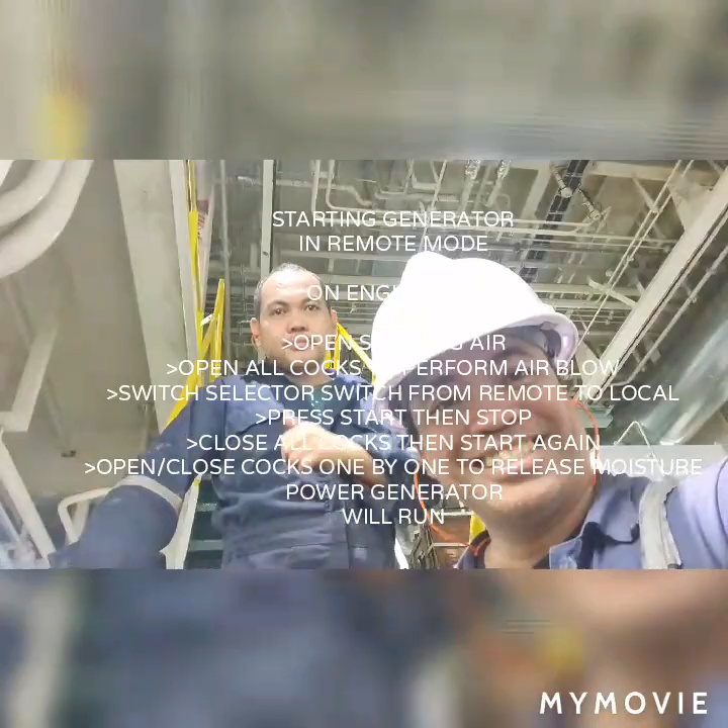So let's go. On the engine side, you will need to open first the starting air. So this is the starting air valve. You need to open this one. Then once you open this one, you need to put this lever from stop position to run position by putting it down.

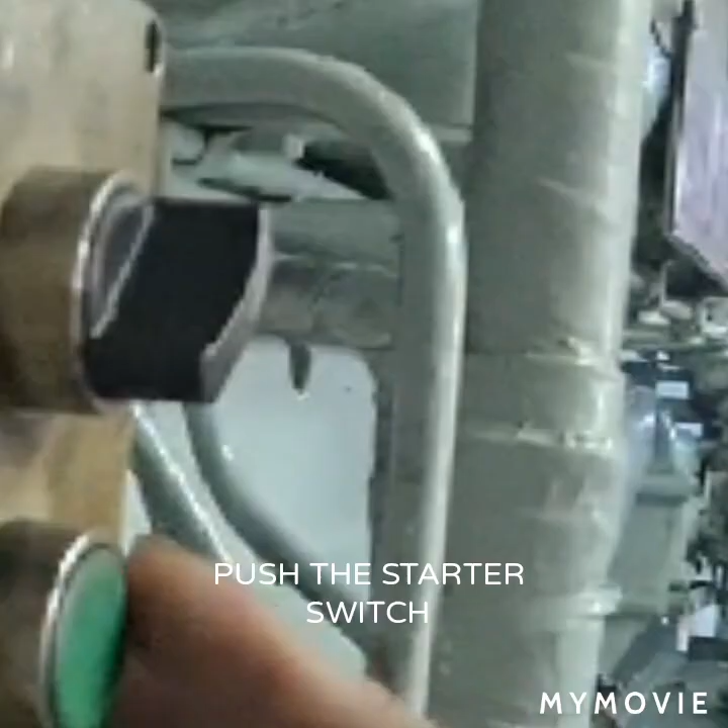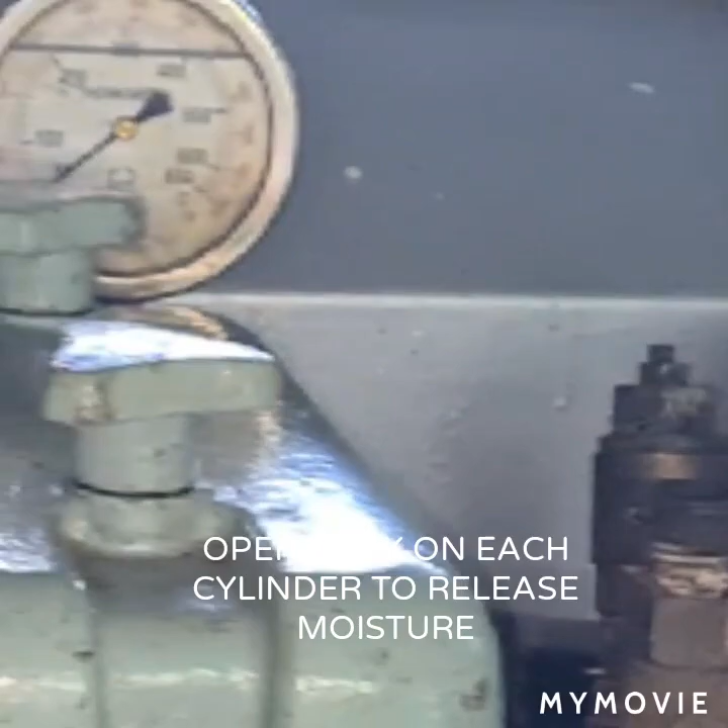This is a mode selector switch which you need to put from remote into local position. Then push the start switch to run the generator where the lever is in run position, and keep waiting until the speed reaches 720 RPM.

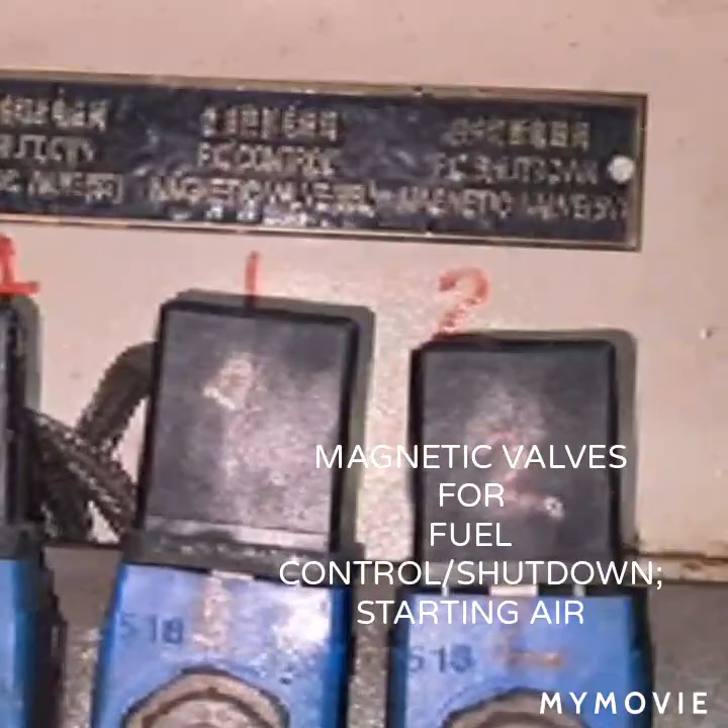Those are the gauges, pressure gauge, temperature gauges from which you will be able to see generator parameters. In practice, when generator runs, all the cocks on cylinders are open to remove and release all the moisture. This is a magnetic valve for fuel control, shutdown, starting air. Those magnetic valves are activated when you start and stop the generators. When generator runs, the fuel is controlled by means of these magnetic valves.

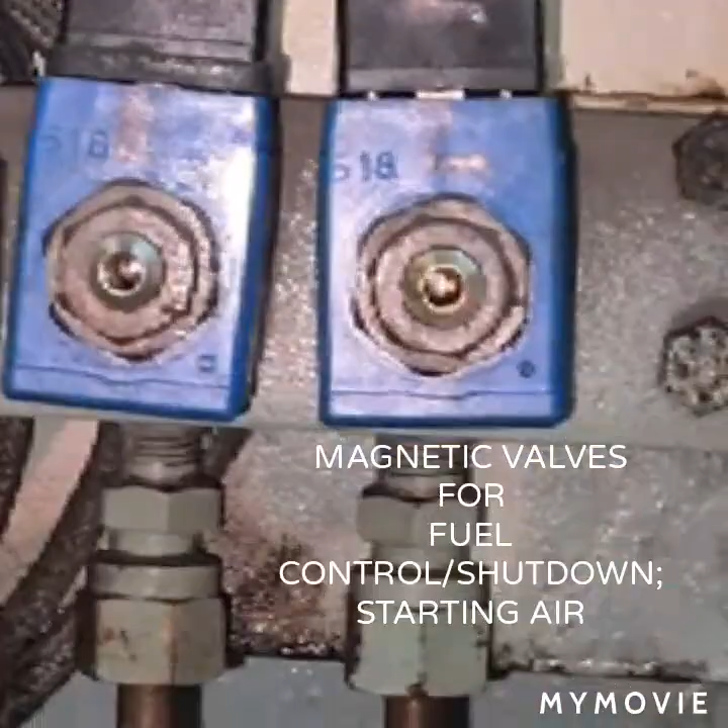This is the speed RPM pickup sensor from which the actual RPM speed of your alternator is sensed and displayed on this panel monitor. Start failure will be activated when the starting air is closed. This ready to start blue LED light will be activated when the pressure, temperature, and speed pickup are in good condition. All the parameters on generator are satisfied.

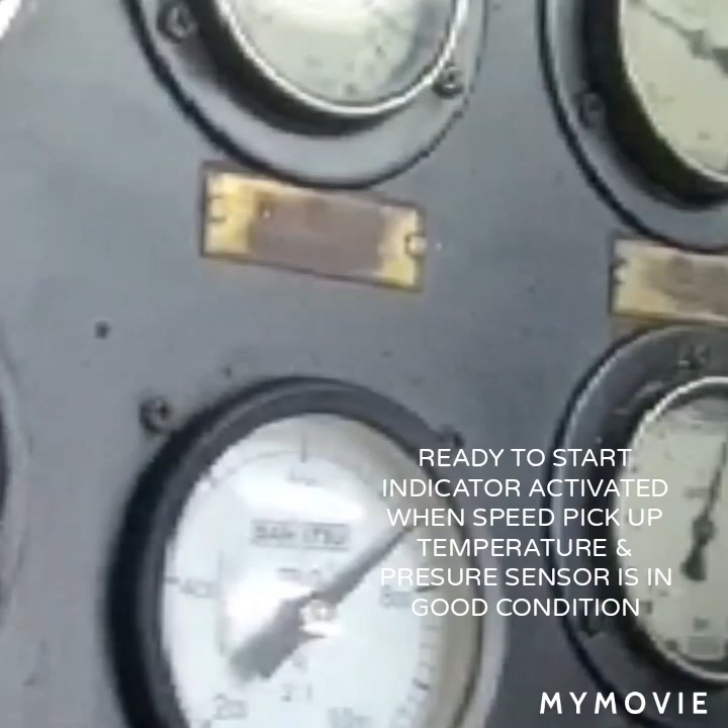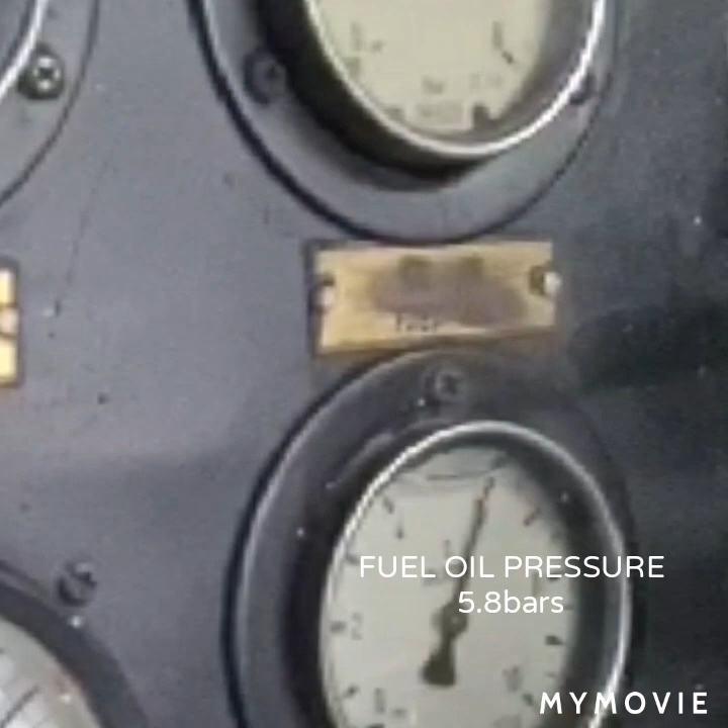In here, you will observe that the fuel oil pressure we have here is 5.8 bars. This is the working pressure of my generator when the generator is running. And this is my revolution per minute, 720 RPM. In practice, when the generator starts at first, open individual cocks to release all the moisture accumulated on the cylinders. 1, 2, 3, 4, 5, 6. I have 6 cylinders.

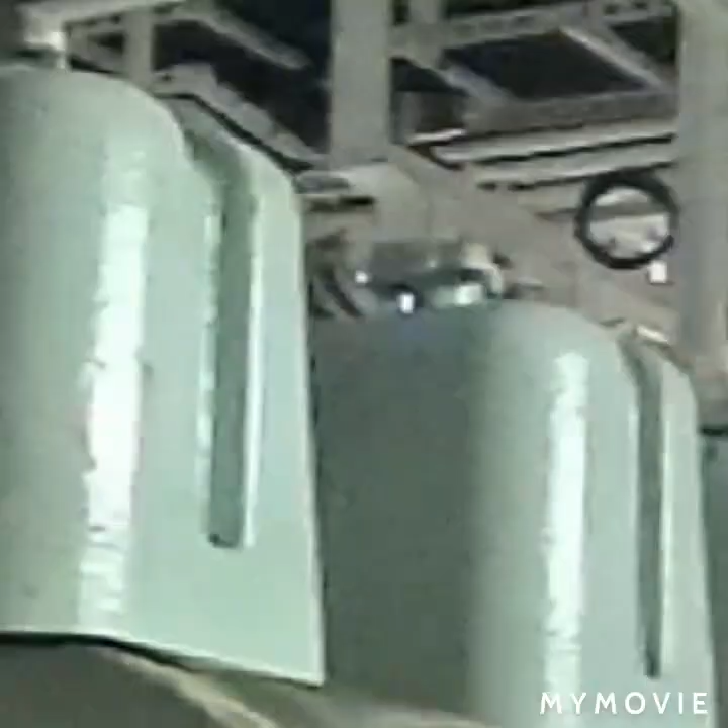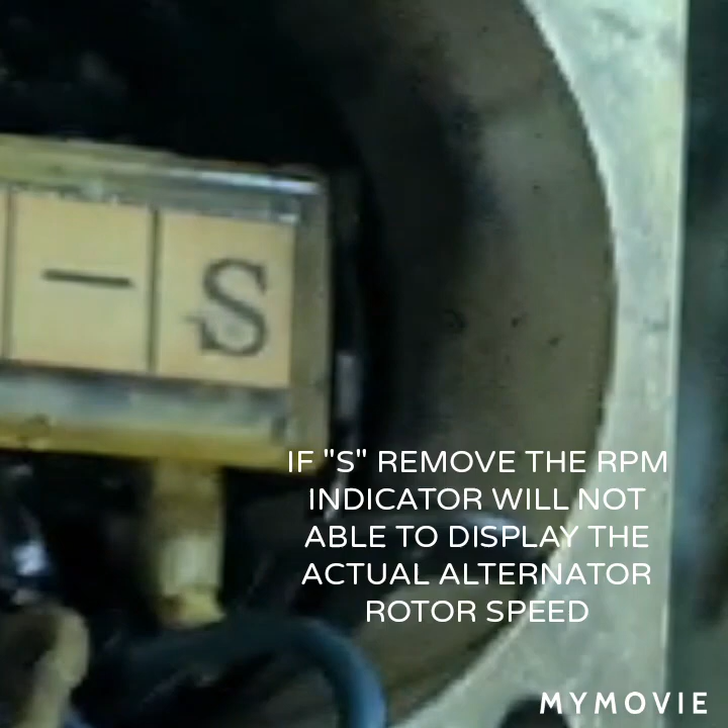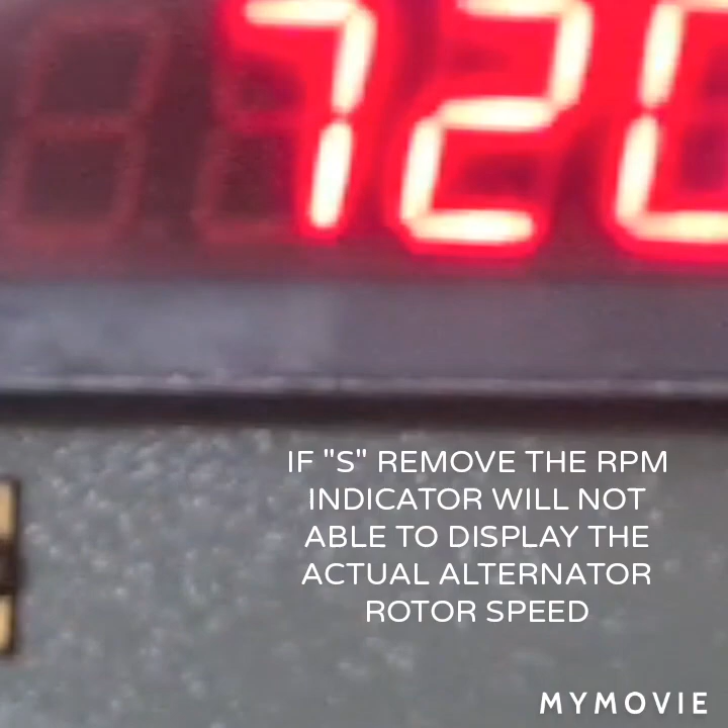This is the RPM speed pickup sensor with plus and minus 24 volts DC supply, and the S is the signal which gives 720 revolutions per minute, displayed on the local starter panel on my generator number 3. Also, I have one RPM speed pickup sensor which is responsible to indicate that my generator is already running.

Once it detects that the alternator is running, the green LED light on the engine control room and on the local starter panel will be indicated. Once it is removed, even if the generator is running, the running LED light on the starter panel and in the engine control room will not be activated. So I have two RPM pickups. One indicates running and one is used to measure the actual speed of my alternator.

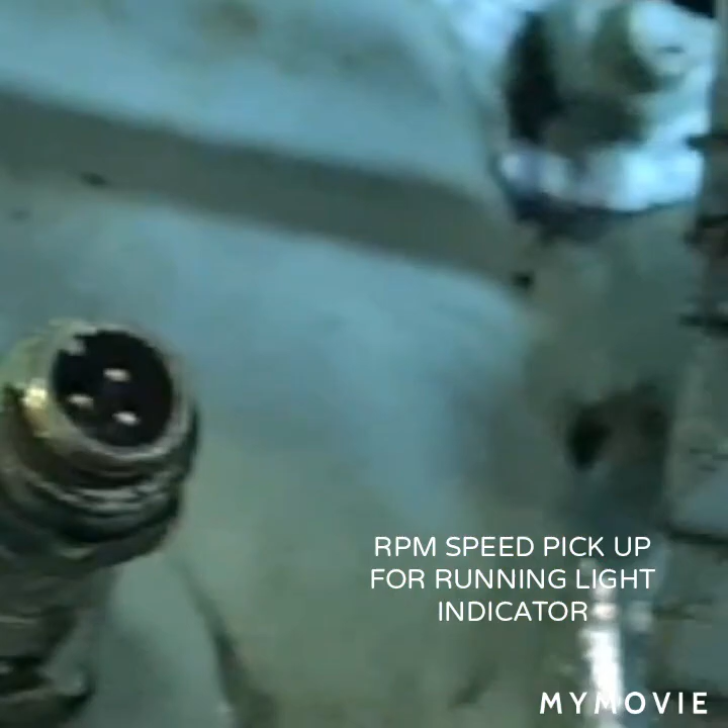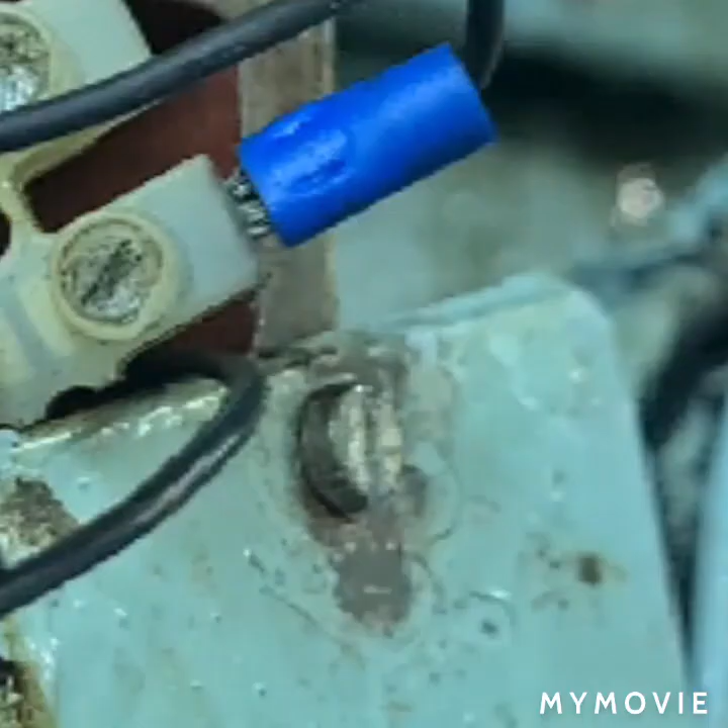This is the terminal of my fuel oil leak. For testing it, I just remove the cables. The normally closed contact will be open and the leakage high level alarm will be activated. But normally, to test this one, you need to put oil in the tank. The floater level switch will be lifted up, the normally closed contact will be open and the fuel oil leak alarm is activated.

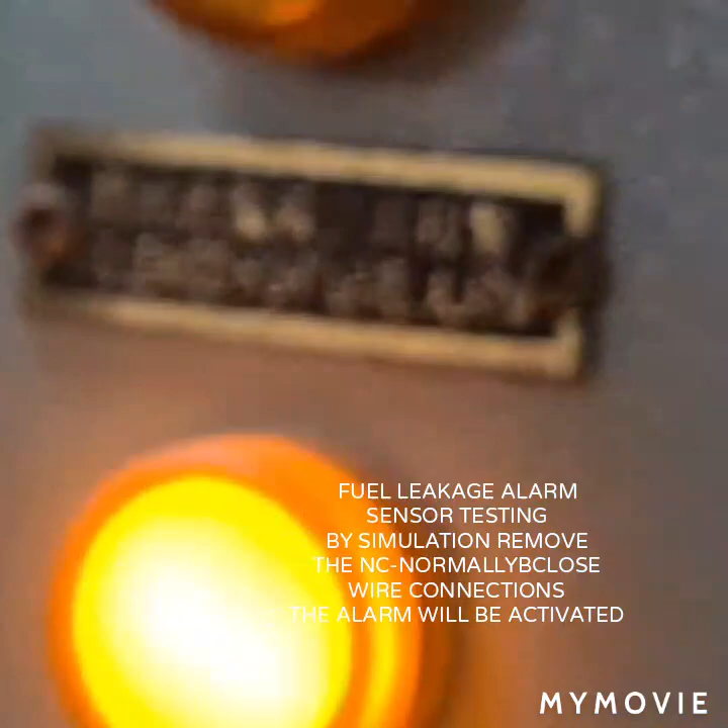Now I'm going to put it back, and as you would notice on the engine control room monitor, all the alarms that we tested will be displayed and verified. Sensors are working.

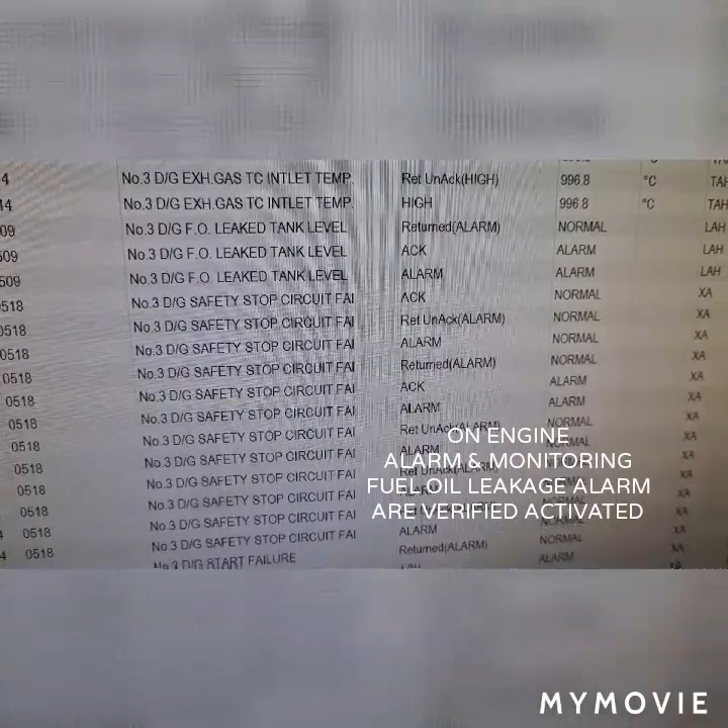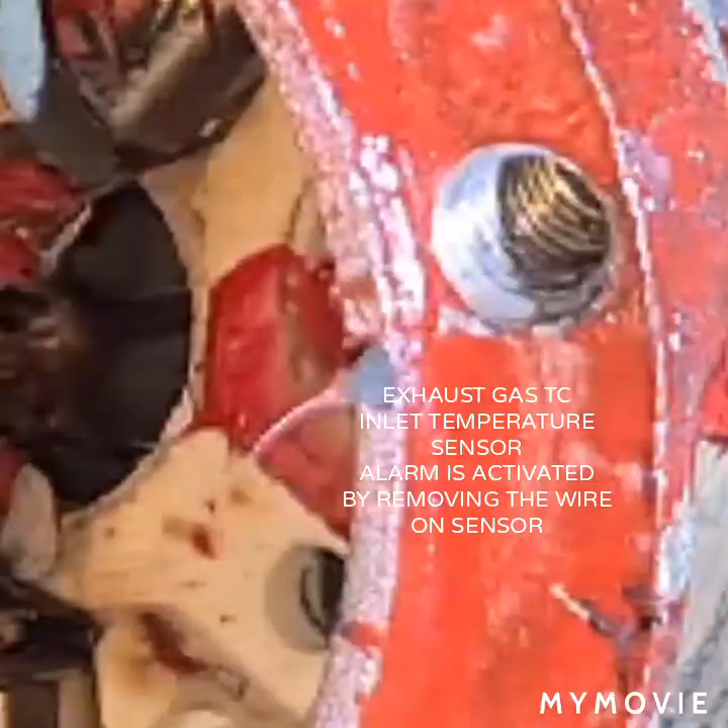This is a thermocouple sensor which monitors the exhaust gas turbocharger inlet temperature, and the alarm will be activated by removing the wire on the sensor. Normally, these sensors monitor the temperature of the turbocharger also.

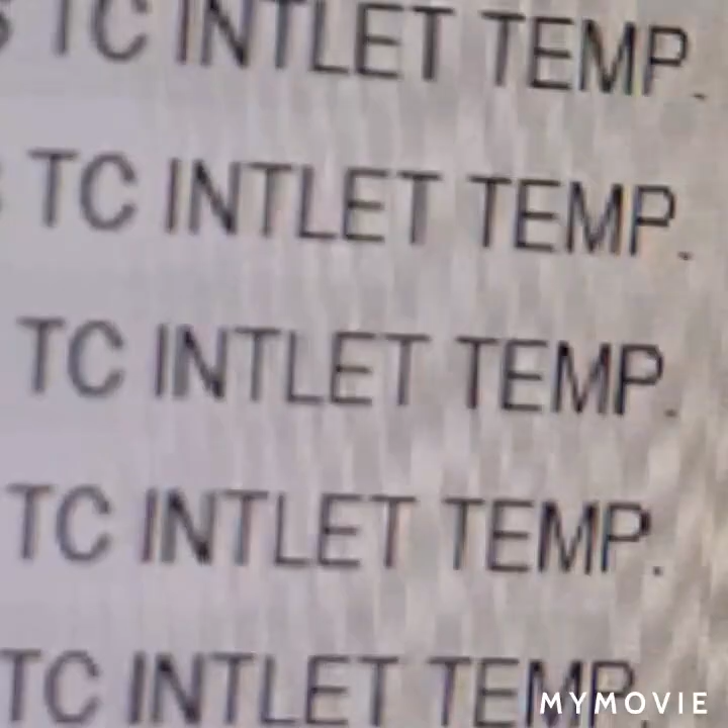On top, I have the HT fresh water outlet temperature sensor. Alarm is activated by removing the wire on the sensor. Normally, its working temperature is 70 degrees Celsius and the high temperature alarm set point is 85 degrees Celsius. Because the location of the temperature sensor is high, I would rather proceed to this terminal box and remove one of the three cables.

Once you remove one cable, the alarm will be activated and it will be reflected on the engine control room alarm and monitoring system.

HT fresh water outlet temperature.

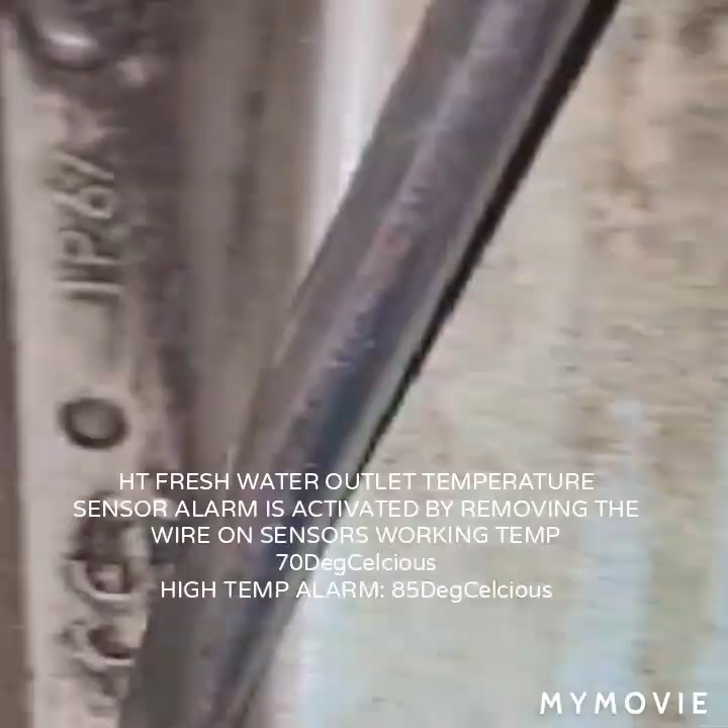This is a thermostat switch known as cooling water temperature high trip shutdown, also known as HTW out temperature high. Alarm is activated by removing the wire on the thermostat switch. The working temperature of it is 69.6 degrees Celsius while the generator is running, and the high temperature shutdown is 85 degrees Celsius. By removing the cable, the generator will stop.

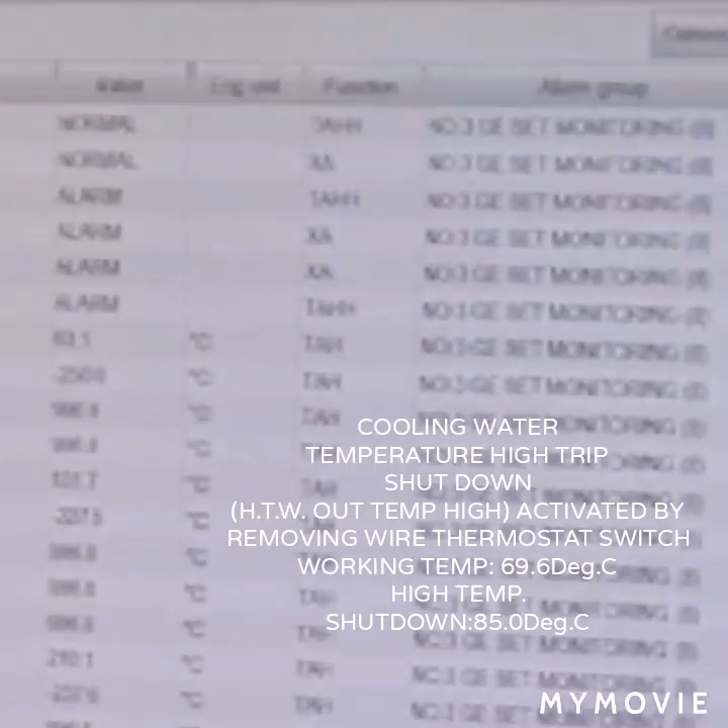As you would notice and see here, there is a red LED light indicated on my panel, and there are alphanumeric codes or letters indicating that the alarm is activated. So we verify that this thermostat sensor is working good. So we need to put back everything, all cables, and start again the generator to continue doing a test of the alarm and shutdown.

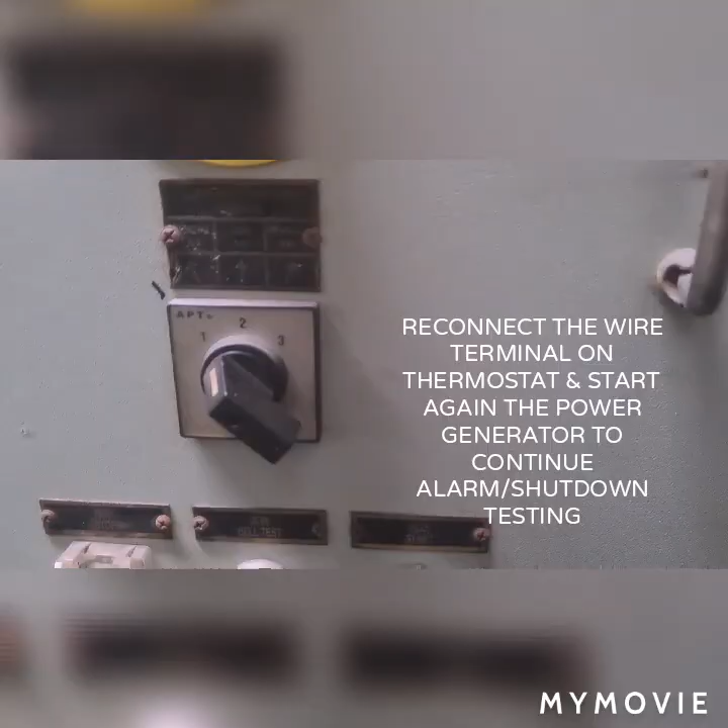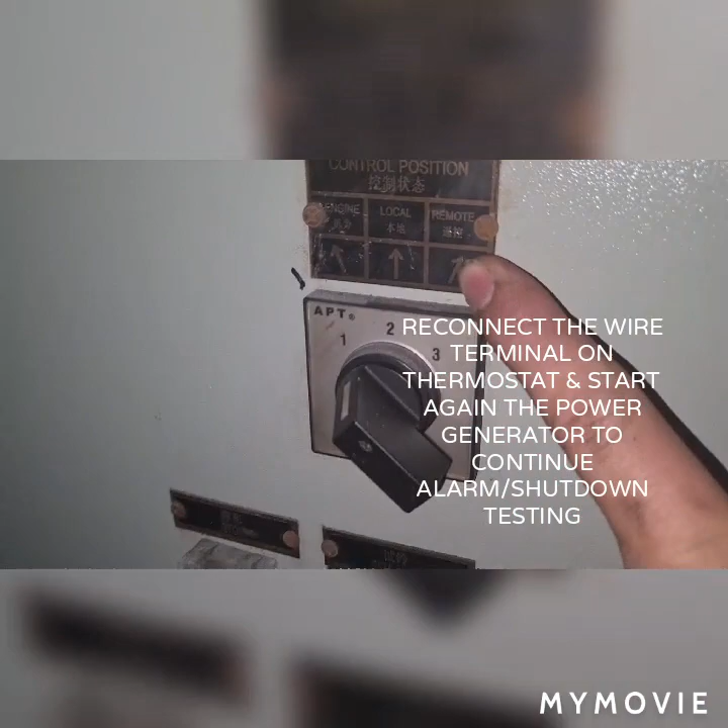This is the switch from which we can select remote or local. The selector switch is used to select whether you can start the generator on engine side or local or on remote. So we prefer to put it on local. By putting it in local, we can start the generator in the engine control room. And in the engine control room, you need to push the mode select. So the green LED light from auto will transfer to manual.

Then press start and enter immediately. Because when you press start and the time elapses without pressing enter, the execute orange light will not be activated, so you cannot start the generator. Once you press start, then enter, the execute start orange light will be activated. Then the generator will establish the voltage 450 volts, the frequency 60 hertz, the power factor of 0.85, and the kilowatt hour will be indicated.

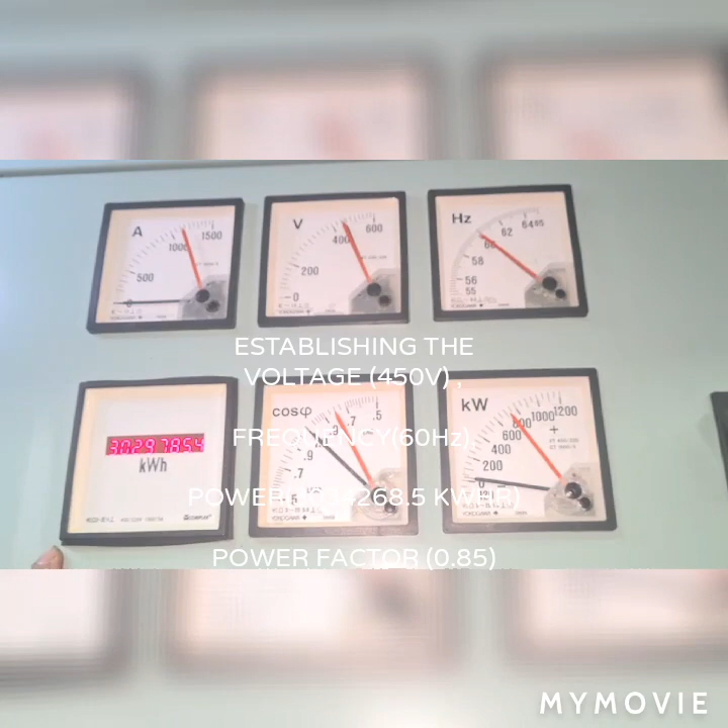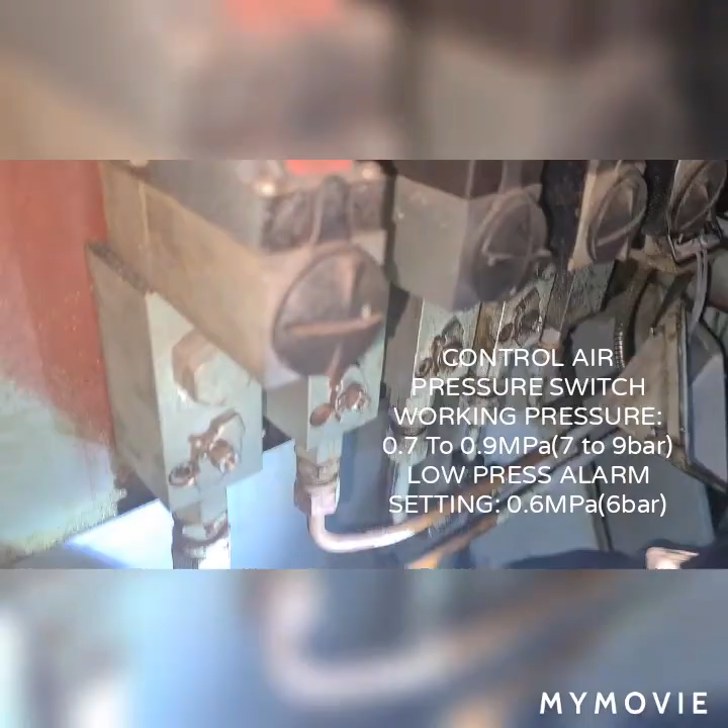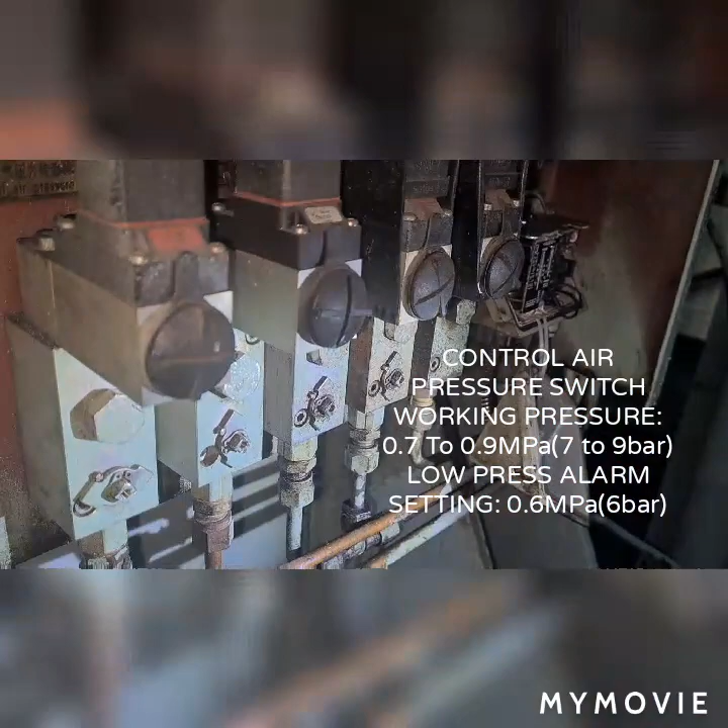Here I have generator 1, 709 RPM, generator 2 at 0 because not running, generator 3 is 722, on which we are performing alarm and shutdown testing. Inside of the box here, I have sets of pressure switches and pressure transmitters. This is a control air pressure switch with working pressure 0.7 to 0.9 megapascal or 7 to 9 bar. Low pressure alarm setting is 0.6 megapascal or 6 bar. Once the pressure drops below 0.6, the alarm for control air will be activated.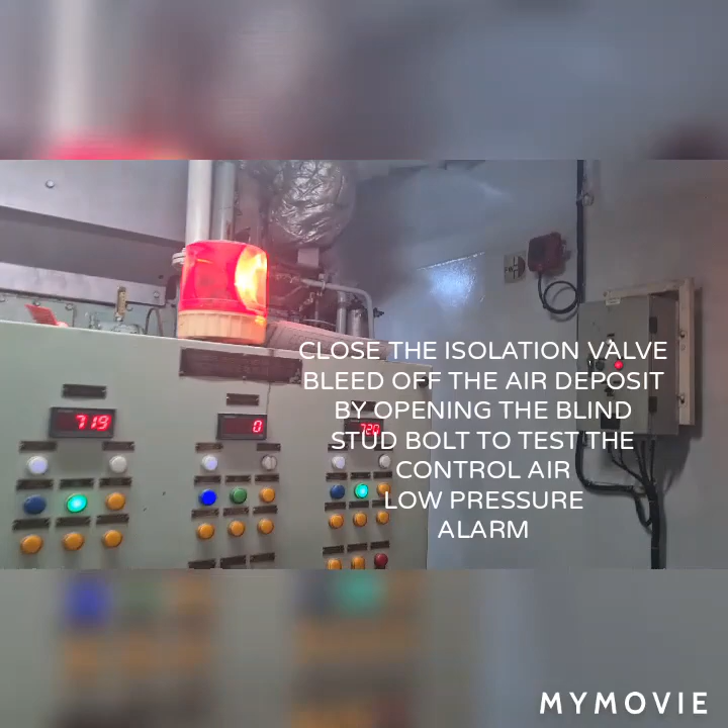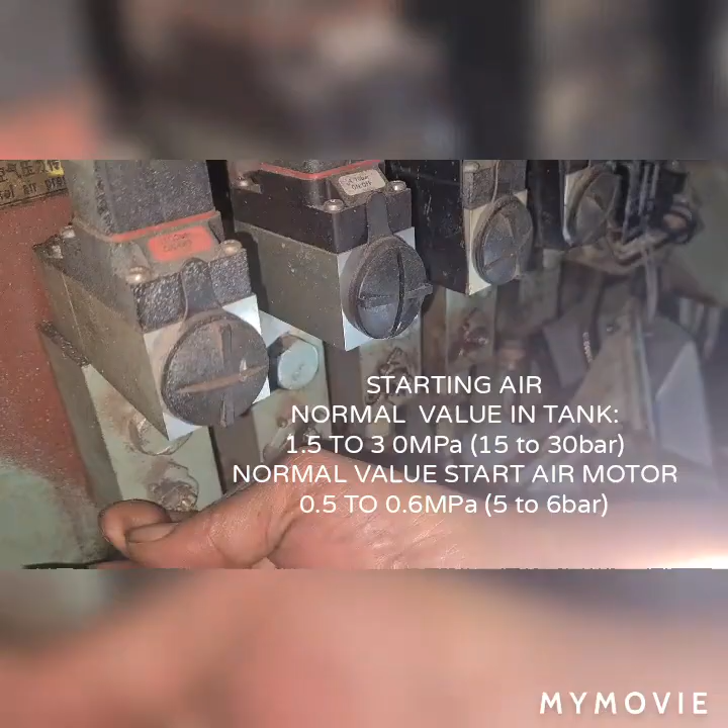To test the alarm, as you have seen, I close the valve and bleed off. This is the stud bolt blind. Once you release the air on it, the alarm is immediately activated. To put it in normal, tighten the stud bolt and open again the valve. And we are also doing a test on starting air. The normal value on the tank is 1.5 to 3.0 megapascal or 15 bar to 30 bar. The starting air motor requires 0.5 to 0.6 megapascal or 5 to 6 bar. Once you do the test, you need to close the valve and bleed off the blind stud bolt here.

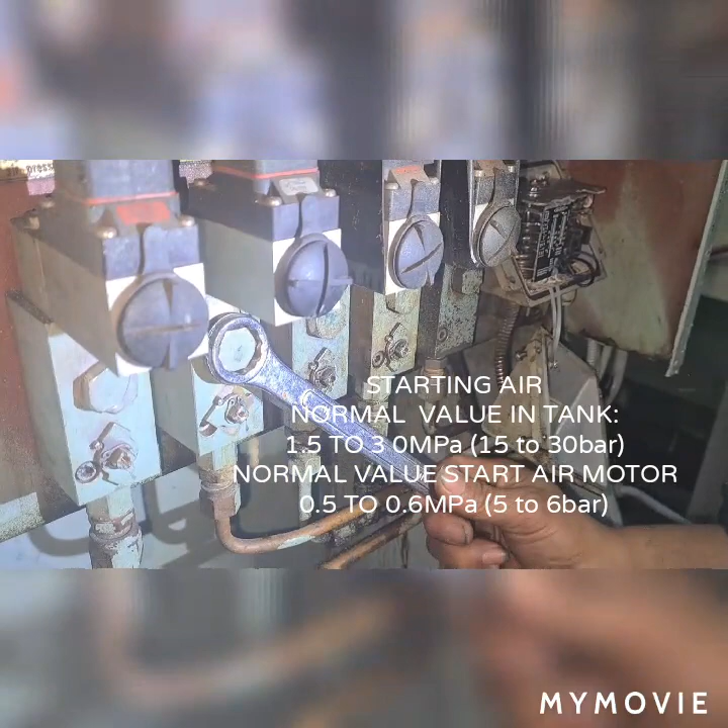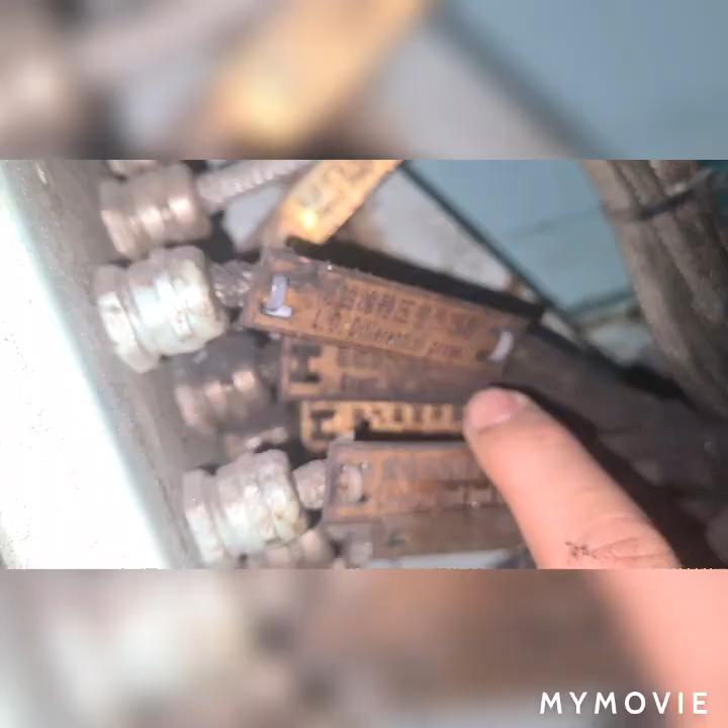But during the test, I found this pressure switch malfunctioning. So to do a test on it, I traced out the cable going to my terminal box, and from here I found two wires. So I'm going to remove one wire so I will be able to test the starting air alarm. By removing this one, the alarm is immediately activated. So we verified it in the engine control room alarm and monitoring panel, and we were able to test the starting air alarm.

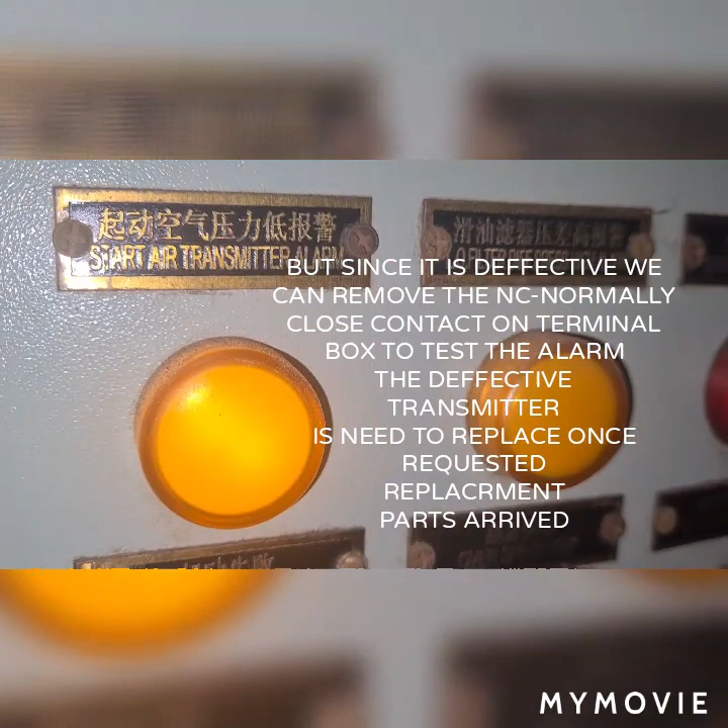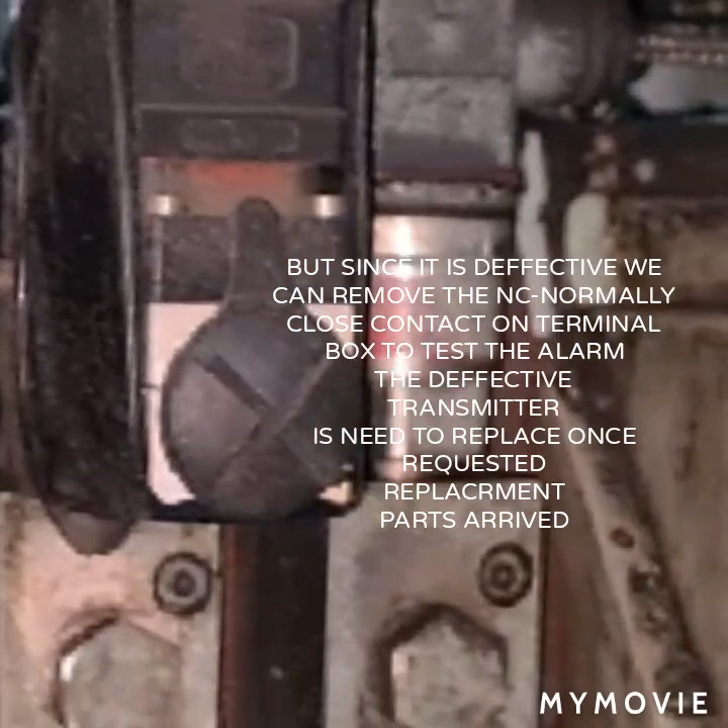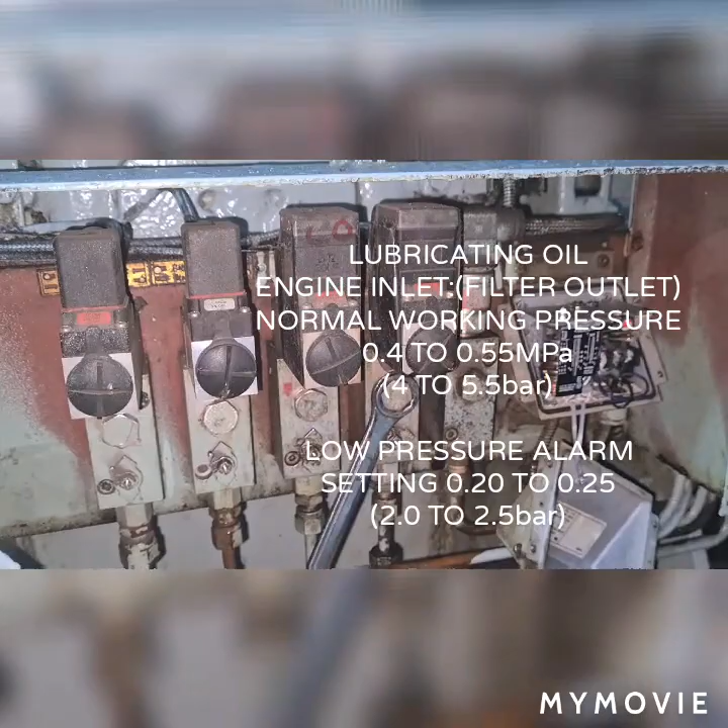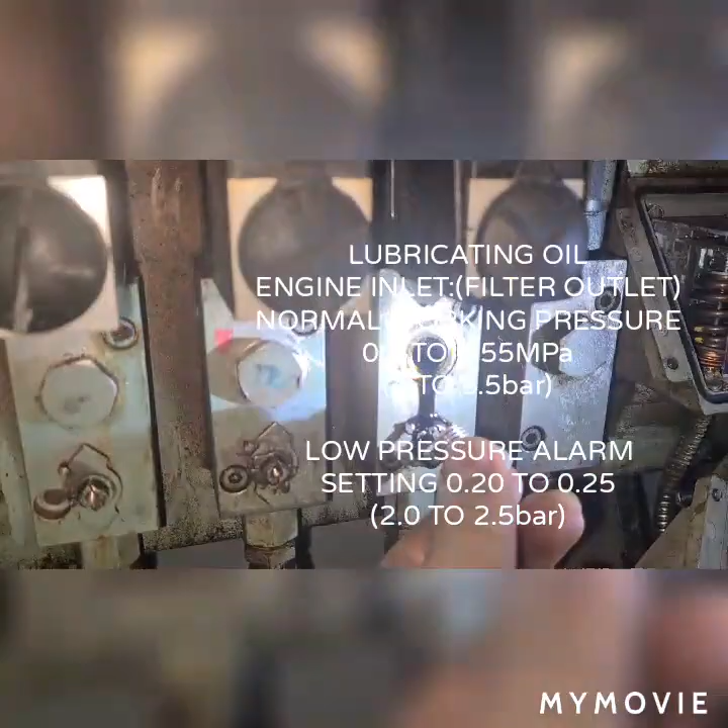And here I have another sensor. After acknowledging the alarm, I just reconnect the cable on the starting air pressure switch sensor and proceed to another pressure transmitter. This pressure transmitter working pressure is 0.4 to 0.55. Then it has a set low pressure alarm of 2 to 2.5 bar or 0.20 to 0.25. This is responsible to monitor the lubricating oil engine inlet, filter outlet, and we verified this lubricating oil low pressure alarm is also activated on the engine control room alarm and monitoring.

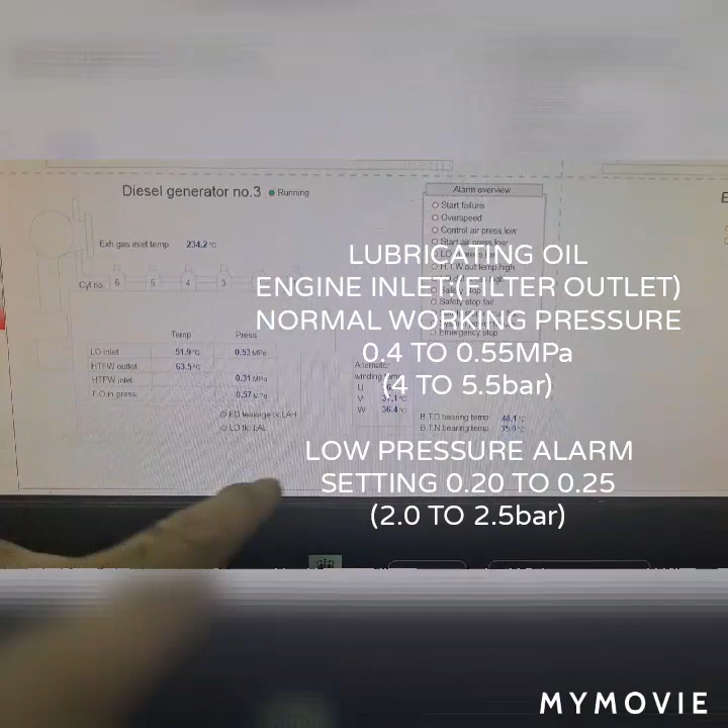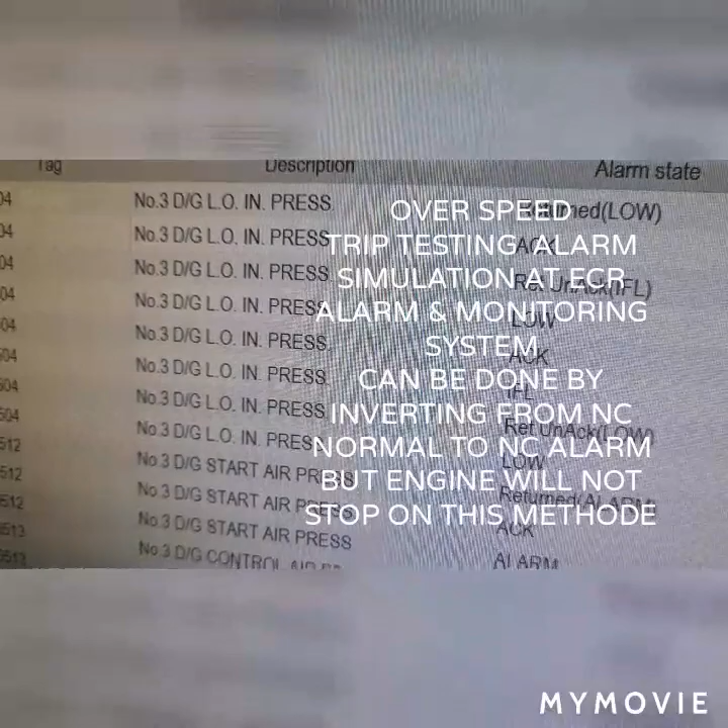So here we can also test the overspeed trip by simulation. At the engine control room, the alarm and monitoring system, it can be done by inverting the normally closed normal to a normally closed alarm by changing or inverting the no to yes. Once you invert it to yes, the overspeed trip alarm will be activated. But take note, you are no longer able to stop the engine when you do a simulation test for overspeed trip inside the engine control room on the alarm and monitoring system.

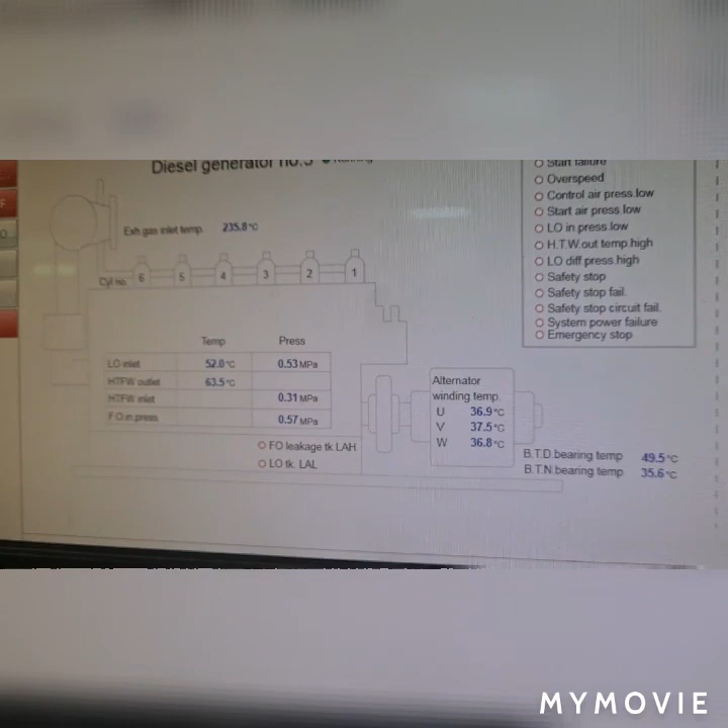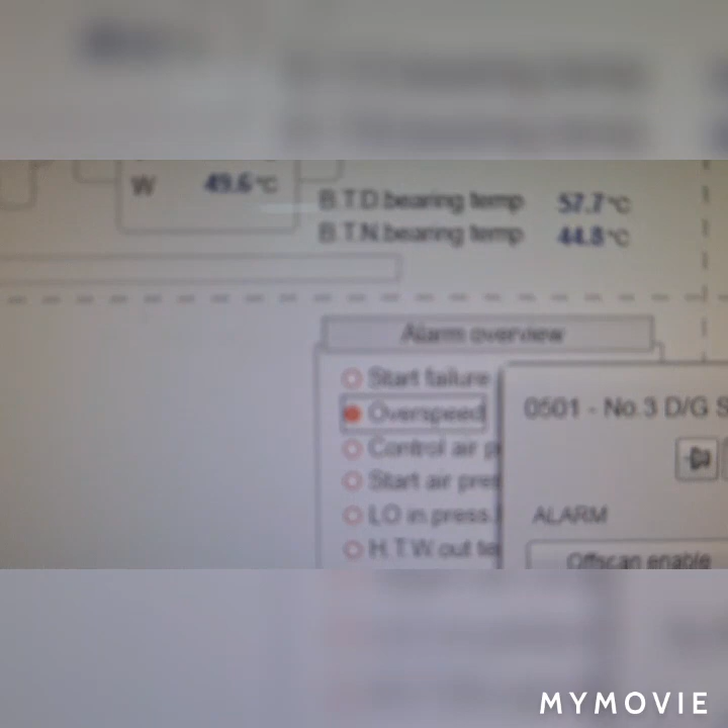In doing this, just proceed to the alarm parameters. Alarm, then alarm close. In here, you will find parameters. Then go down. This you need to invert. On this inverse input, make it yes. Once you tick yes, the alarm for overspeed trip will be activated. This is one way for you to test the overspeed trip without shutting down the generator, which is running without load, off the bus bar.

So because we are already done, we need to put the input back to normal close, then acknowledge the alarm.

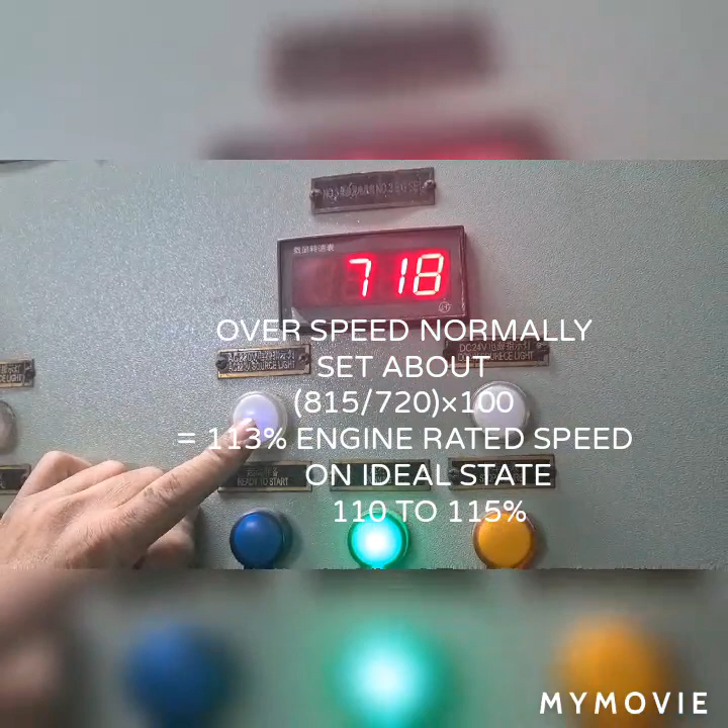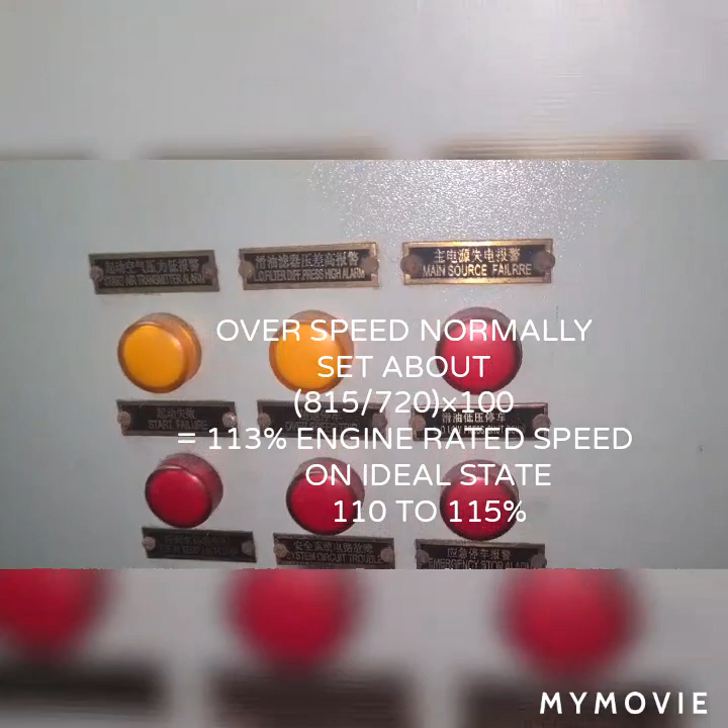Here I have 720 RPM. Normally the overspeed is set at about 815; divided by 720 and multiplied by 100, that is 113% of the engine rated speed. Ideally, it is set at 110 to 115% over the engine rated RPM value. But here on board, we verified that the overspeed trip is activated at 113%.

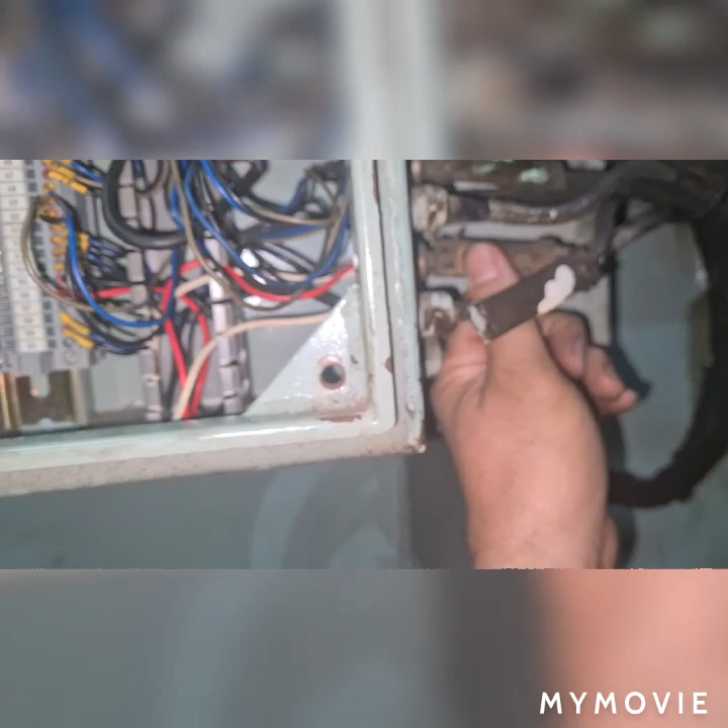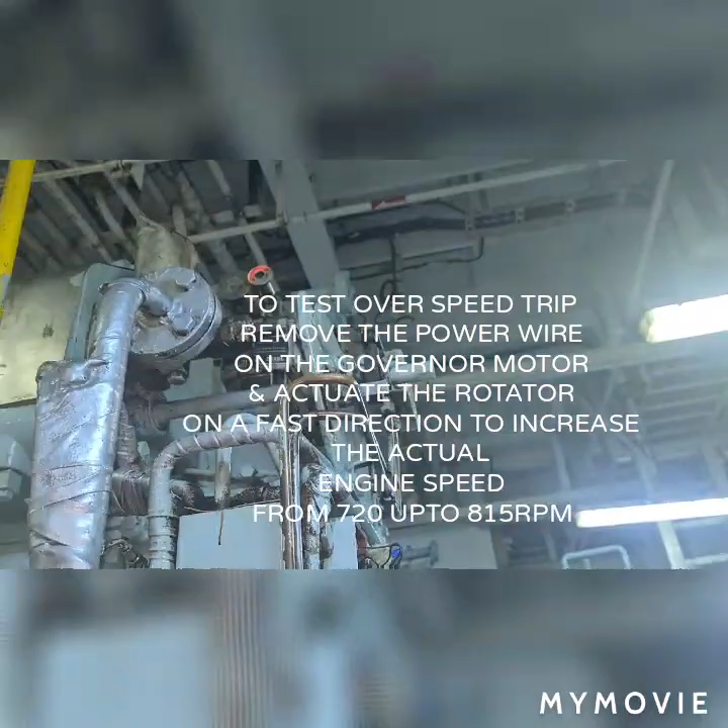To test the overspeed trip, you need to remove the power wire on the governor motor and actuate the rotator in the fast direction to increase the actual engine speed from 720 up to 815 RPM. You can do it gradually. Then you must pay attention to the speed displayed on the RPM indicators and the local tachometer on the engine side gauges.

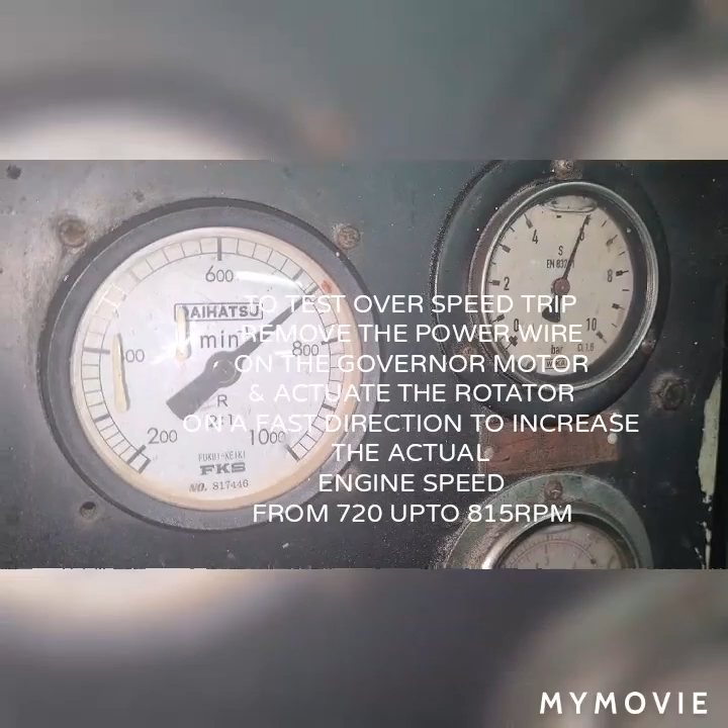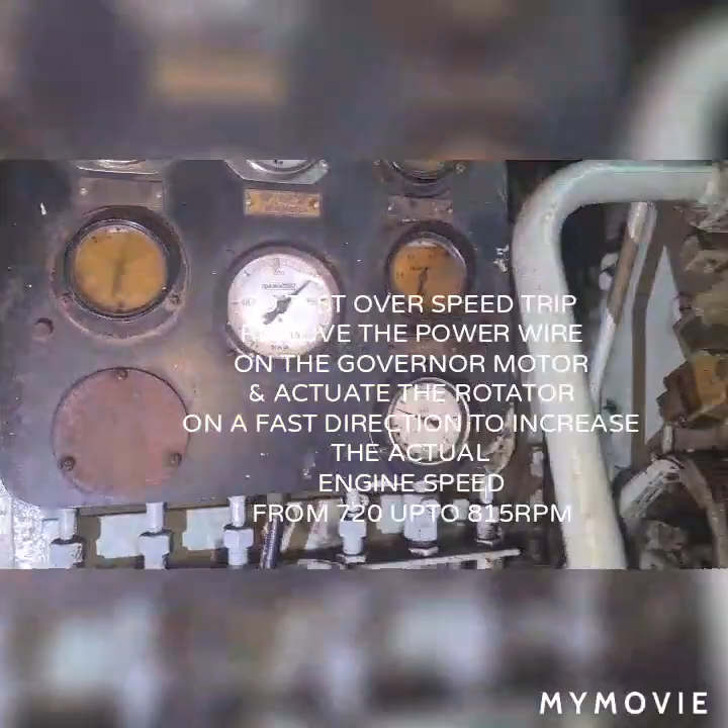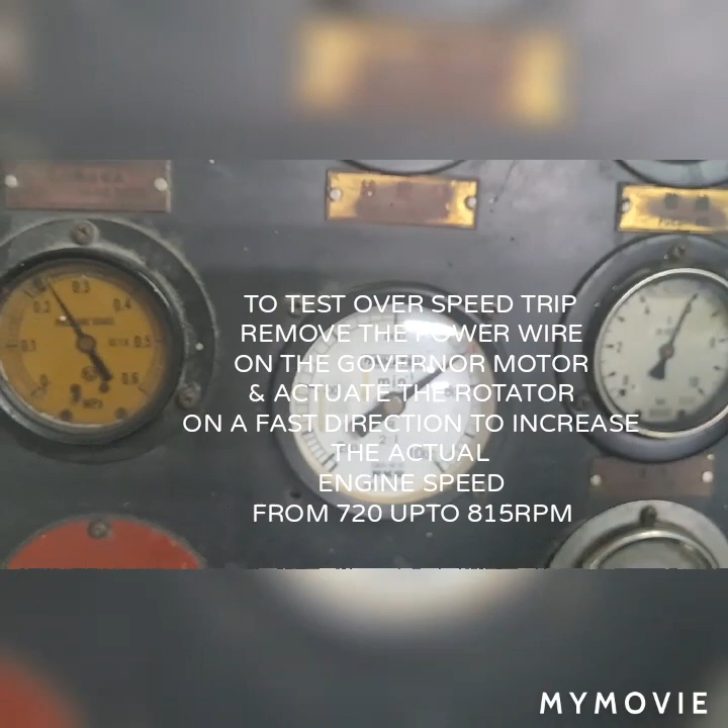While monitoring it, one crew with me, the third engineer, is rotating the rotator in the fast direction. So from 720 I now have 754 revolutions per minute, increasing to 769, 764, 767. Compared to generator 1, which has 720 RPM. We will wait until the revolutions per minute increase.

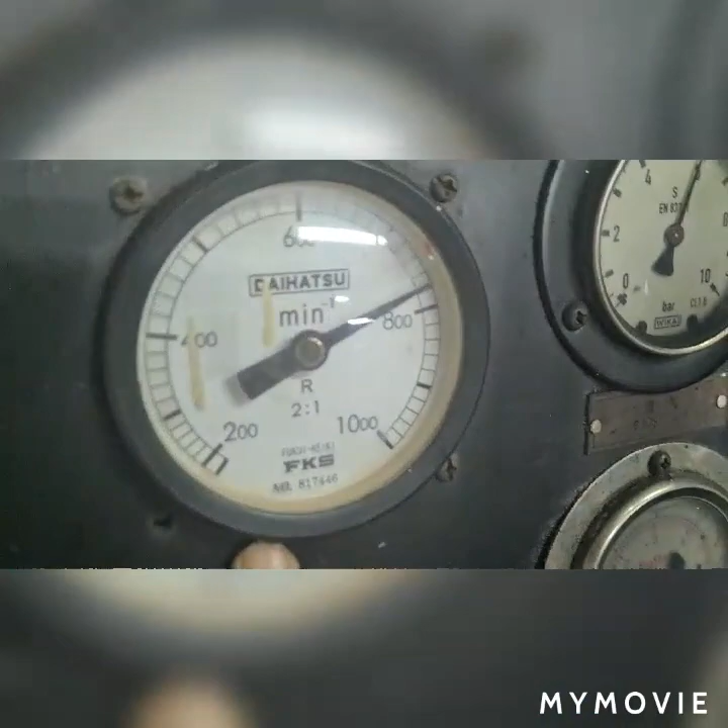Now I have 798, 795, 794. Now I have 811, 815. My overspeed trip was activated, so better to put a mark on it for future testing. You can see here the overspeed trip is activated on my local control panel, and after doing the test, just restart the generator,

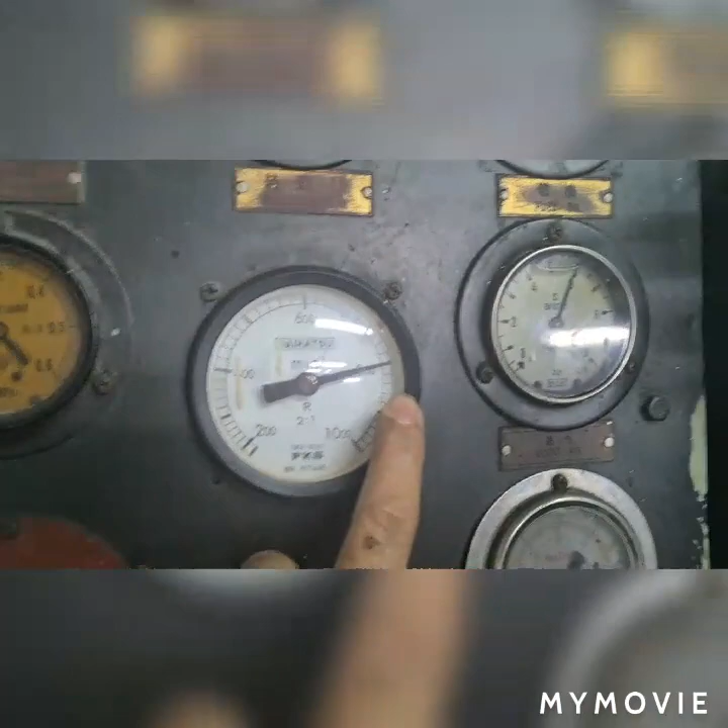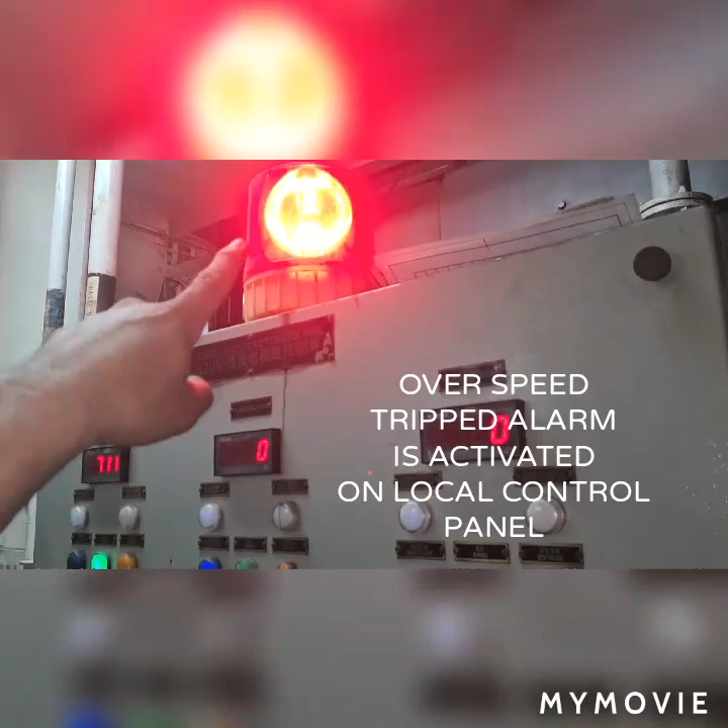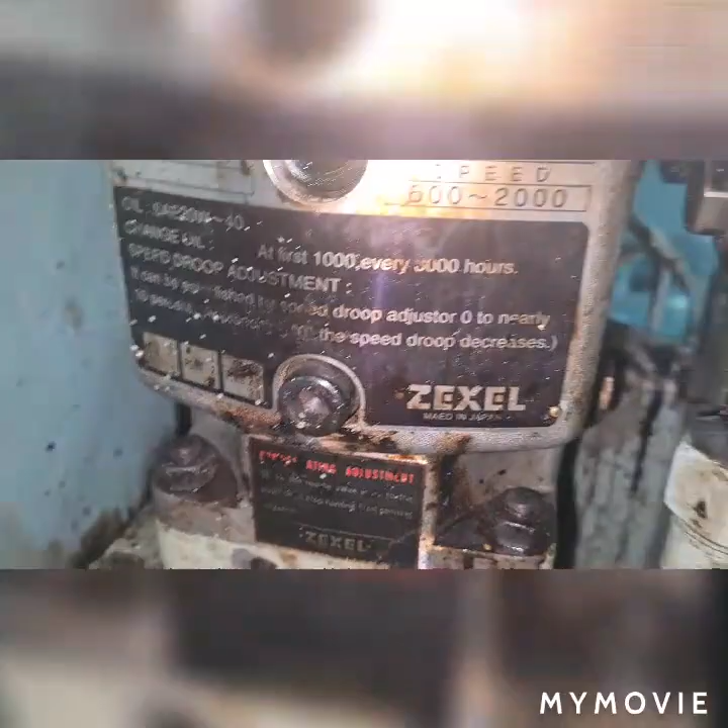then remove the wire, then start again, and bring back the RPM from 815, lower it gradually down to 720 revolutions per minute. So we can proceed to another shutdown test. This shutdown test is the lubricating oil, but first we need to put back the rated RPM of about 720 revolutions per minute.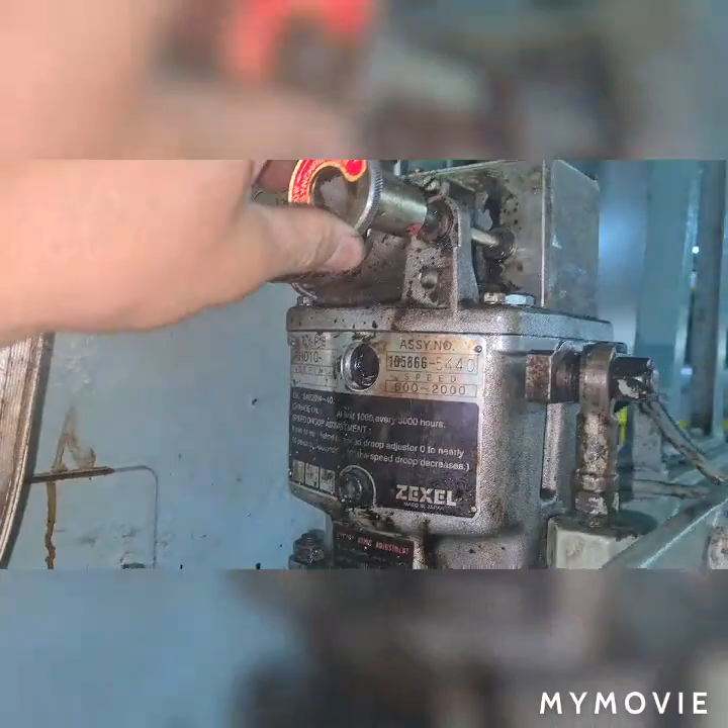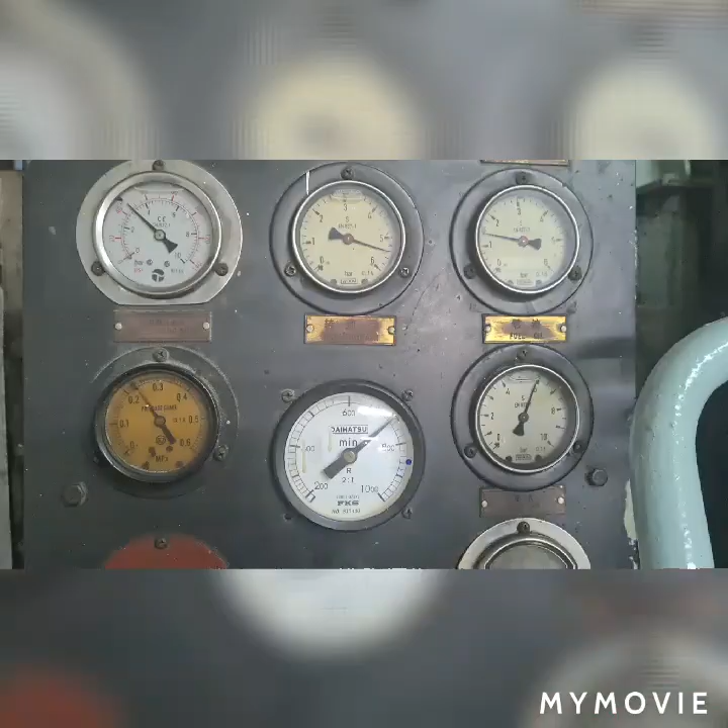So guys, as you notice here, I have 740 RPM. It should be 720 revolutions per minute as stated on my alternator nameplate. This alternator is 750 kilowatts. Now I have 723 revolutions per minute. On my local tachometer, you will see I also have 720. Those are the gauges where the parameters of your generator can be seen. So we can now proceed to the lubricating oil testing.

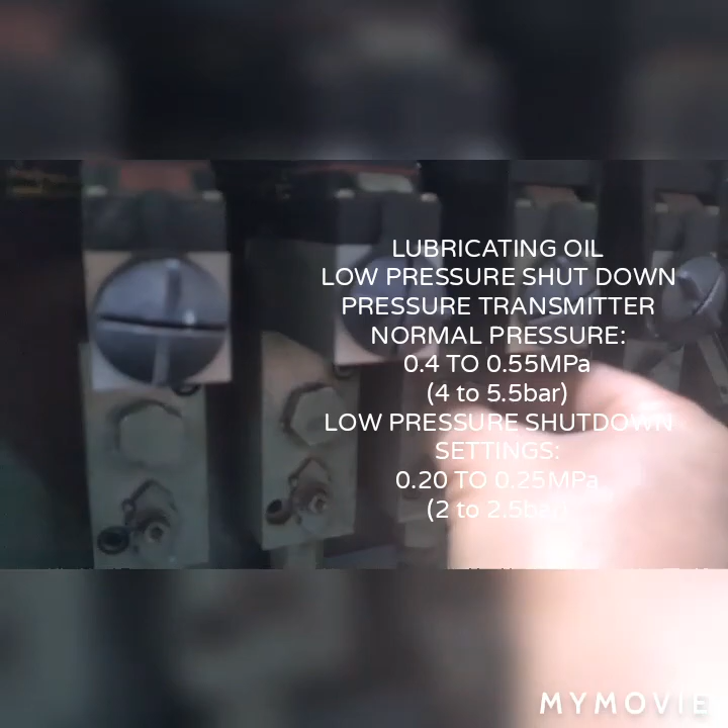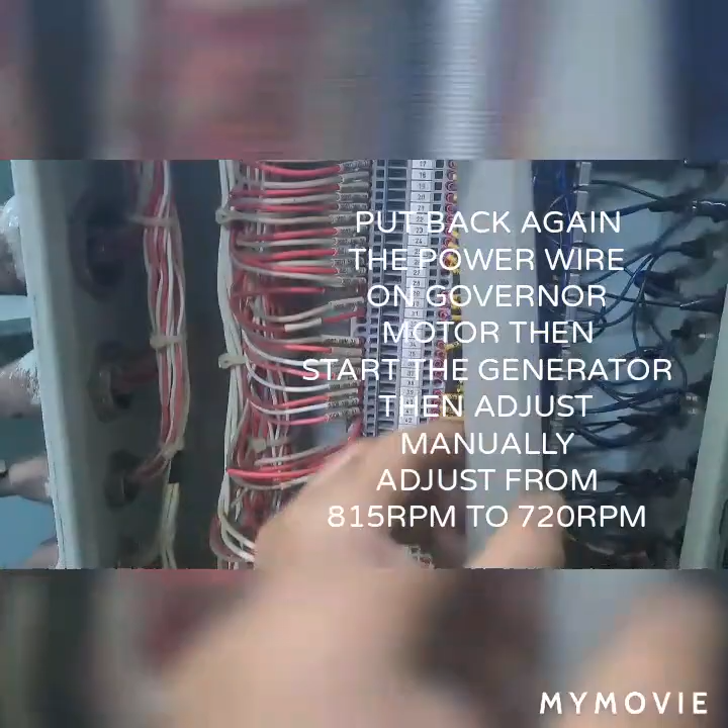Close the valve, lift off, then the generator low lubrication oil shutdown alarm will be triggered. Lubrication oil is normally 4 to 5.5 bar, and it becomes activated at 0.2 to 0.25 megapascal. So we need to put everything back as is. Fix all the pressure transmitters and pressure switches; all terminal connections must be put in place with the original wiring as stated on the wiring diagram. So the generator is ready for use once this standby generator is needed.

So guys, that's it. Here is a list of alarms: start failure, overspeed, control air pressure low alarm, start air pressure low alarm, lube oil pressure low alarm, high temperature water temperature high alarm, lube oil differential pressure filter, safety stop, safety fail. We also have system power fail and emergency stop.

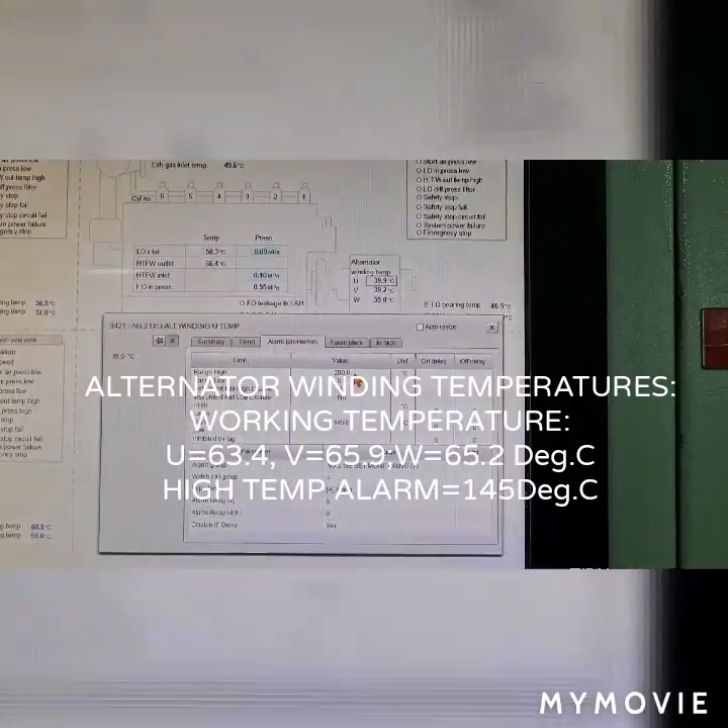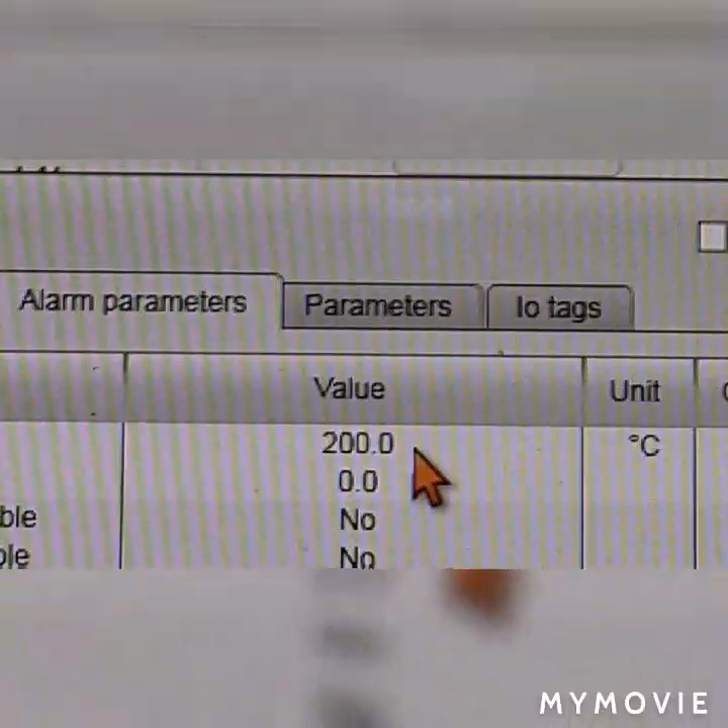The alternator also has U, V, W winding temperatures, with working temperatures of 63.4, 65.9, and 65.2 degrees Celsius, and the high temperature alarm set at 145 degrees. You can test it by removing the wire connection on the alternator side so that the alarm will be activated.

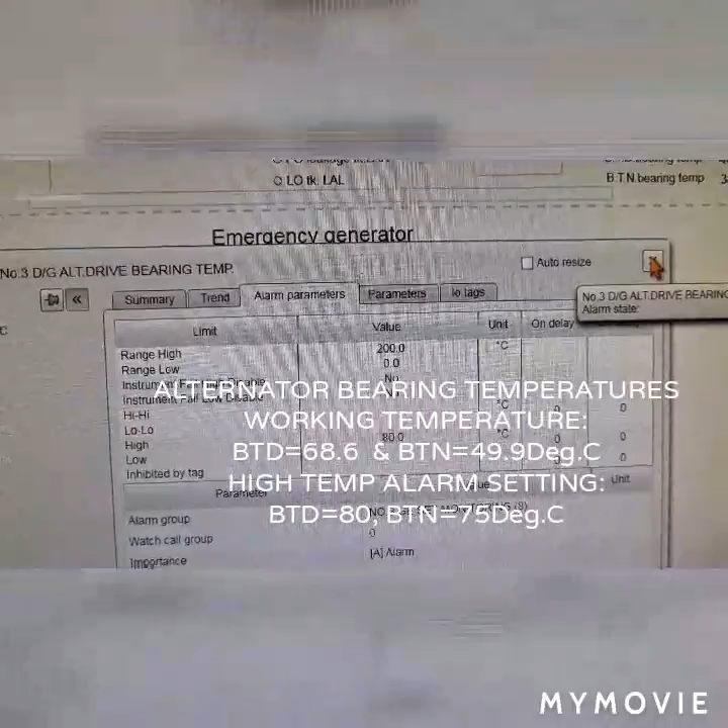The alternator also has bearings, the BTD and BTN. Bearing BTD, the drive end, has 68.6 degrees Celsius. BTN, meaning the non-drive end bearing side, has 49.9 degrees Celsius. The high temperature alarm is set at 80 degrees on BTD and 75 degrees Celsius on BTN.